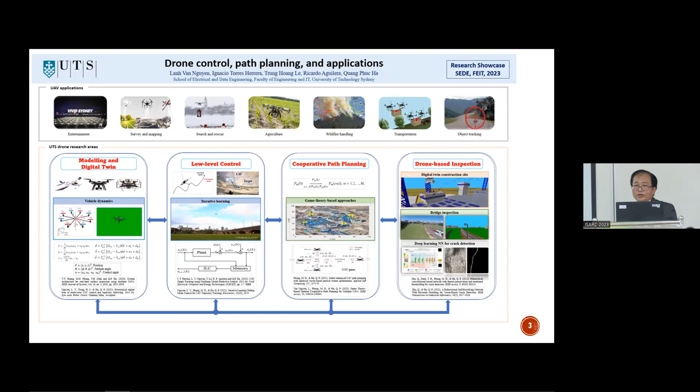Duplicate of this is the digital twin of a monorail bridge, and the computer program to duplicate it. The imaging can go into the next phase of deep learning in order to process the image captured by the drones. And that is our introduction of the whole project.

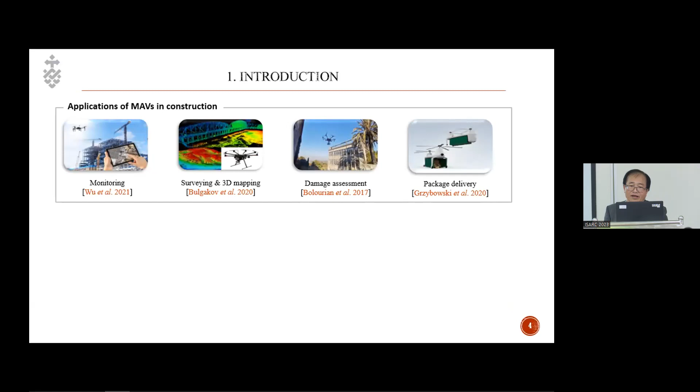It's rather large. We just take a small part in digital twin to present here. You see that a couple of applications are there. The challenge also there, particularly faulty cases or any unexpected scenarios that can happen to the team of UAVs.

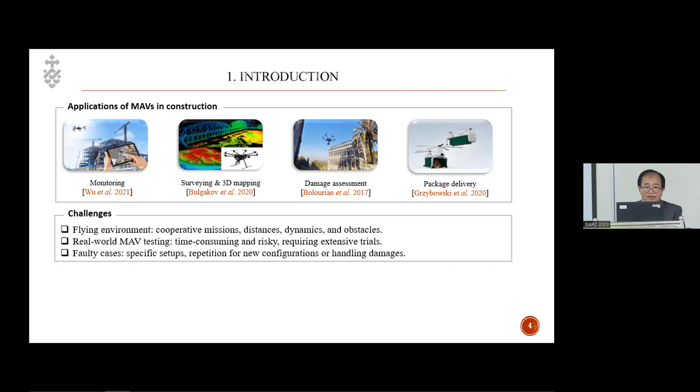So the solution is we have to duplicate that, and the digital twin offers a tool in order to verify for the engineers or the manager to predict the possibility of an incident that can happen, and then we can easily deploy that in practice.

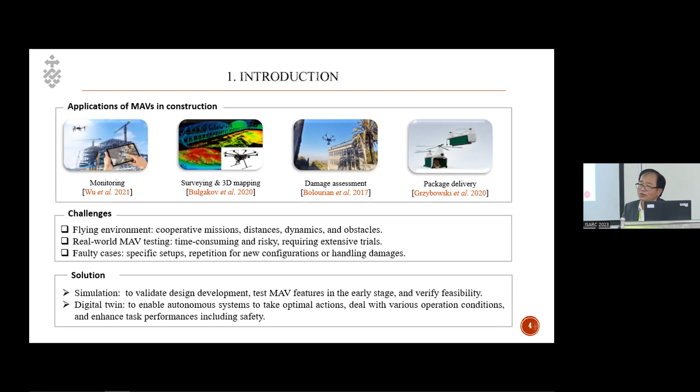Now, this is a multi-rotor aerial vehicle dynamics. If we notice the symmetry between them, then we can understand that everything can be rendered via Lagrangian equations. But finally, it is the thrust that is the summation of the thrust from each rotor to lift up this helicopter.

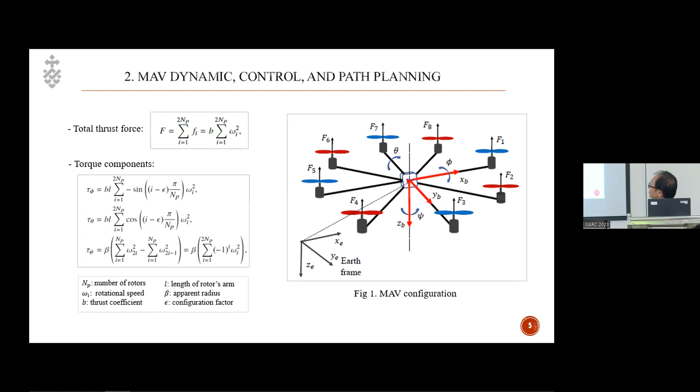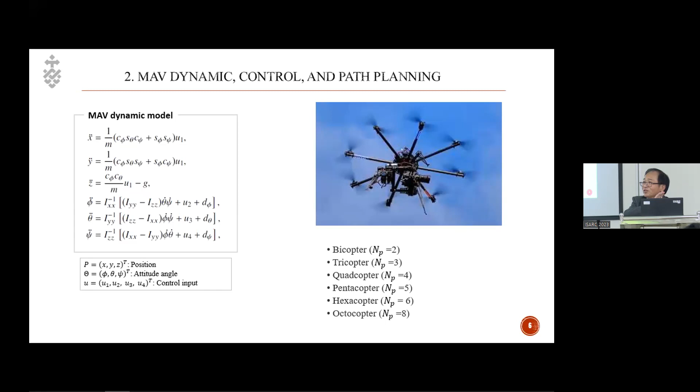So I pose a question from my PhD student as to if there is some fault with one rotor, then maybe you can survive that, because if you use a multi-rotor, for example 8 rotors, you just drop a symmetric pair of those motors and make it survive to at least get back to the headquarters or safely protect it. That is one of the motivations that we use the digital twin, because you cannot just switch off one motor to test that.

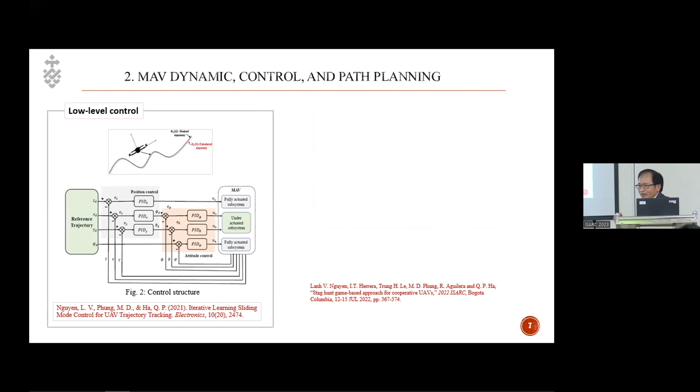So basically for low-level control, our previous work was on how to gain the robustness of the control system so that one of the rotors can be controlled properly, and then you can control them as a team. Coming up to cooperative path planning, this is the application of game theory in order to coordinate the team to execute a robotic task.

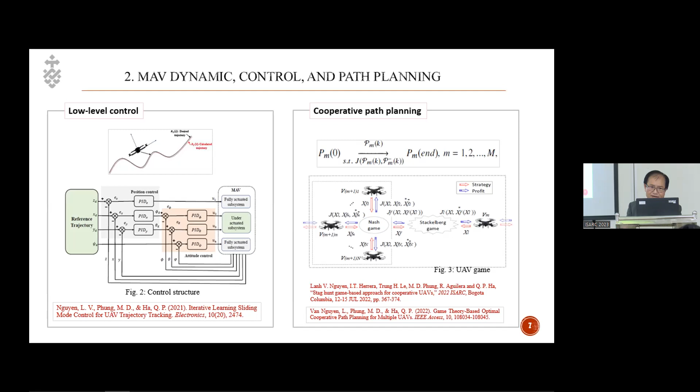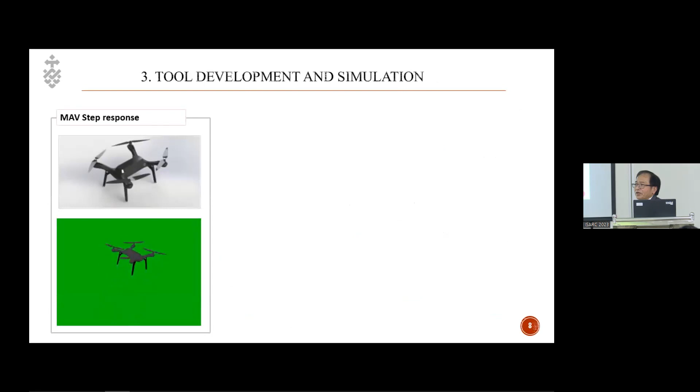We come up with a single task, let's say here is a step response of a dynamic system, if you are familiar with that. From that, you can see the transition of any multi-control mode for this single vehicle. And then we need to capture other equipment.

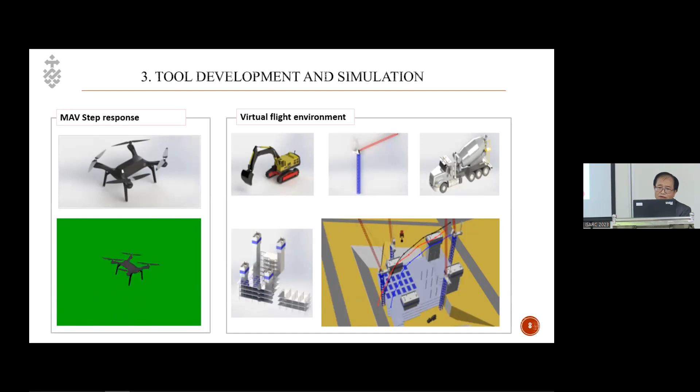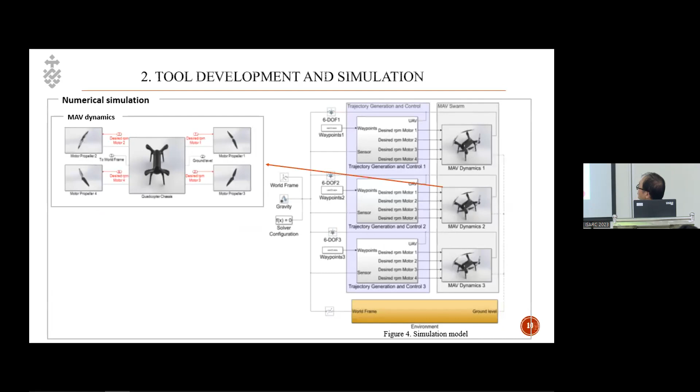For example, excavator, haul truck, tower crane, and the building, etc. And then coming up with how to incorporate this kind of dynamics and interaction into your system. So we have a numerical simulation of that to incorporate in the software, because we develop it from A to Z, so we can manipulate every step of that. I'll just skip some other steps.

If you look at our trend for new direction in development, then the concept of smart city, addressing highly dense population in one mega city, obviously you need to build or predict the infrastructure to address the needs of humans. The government of New South Wales has just approved building a new airport. The construction of a new airport also presents a couple of emissions, a couple of environmental concerns, so the purpose of surveying is rather important.

And we can apply our digital twin in order to do the path planning for our drones to inspect the construction, decades in the making.

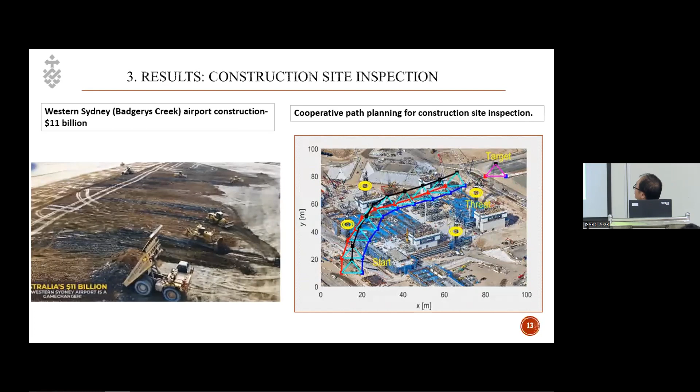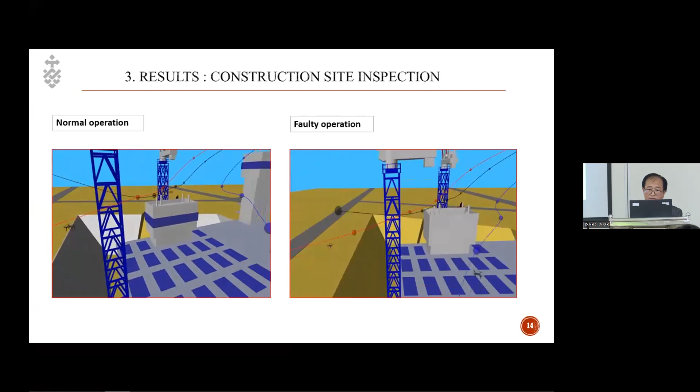So let's say this is a normal operation, and this is a faulty operation to illustrate the concept of how an incident can happen, and the drone can handle the case. So 4 motors would not be successful for the survival. That's think of other things.

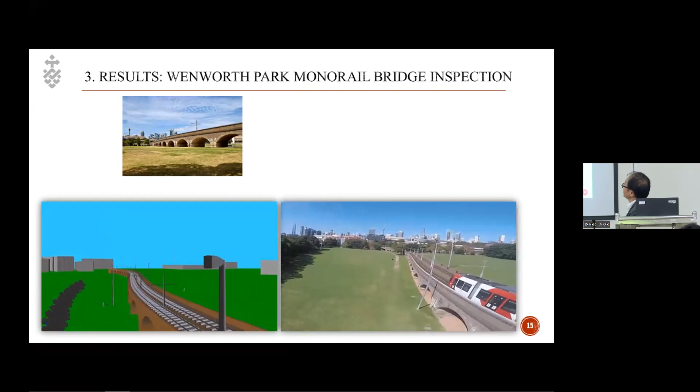Here is the digital twin for the inspection of that monorail bridge. I come to the conclusion that we have a prototype, a digital twin platform for multi-rotor aerial vehicle in terms of path planning and trajectory following.

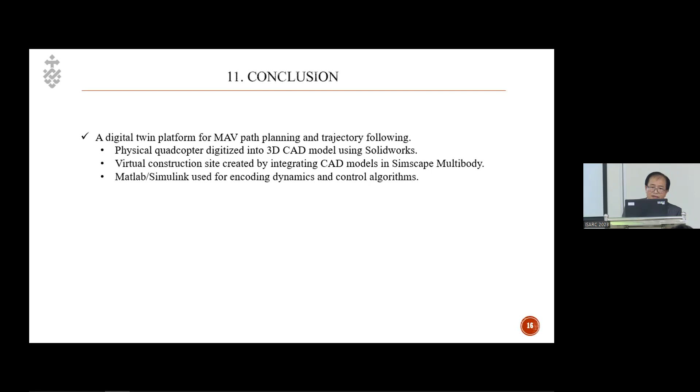Physical quadcopter digitized into a 3D CAD model using SolidWorks and a number of software tools. Virtual construction sites created by CAD integrated into Simscape Multibody platform, and MATLAB Simulink to incorporate the dynamics and control. You do it in simulation, and we use it for path planning.

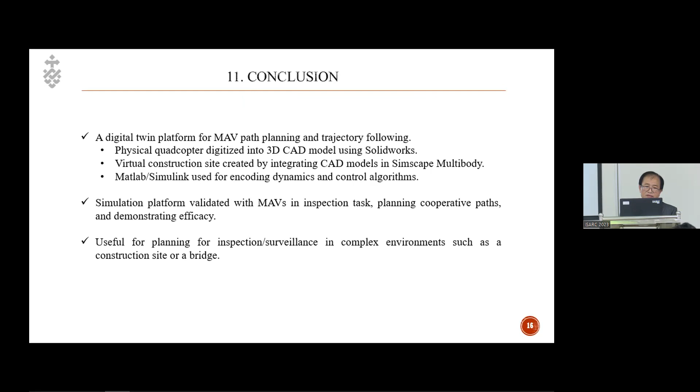To duplicate a complex environment such as the site of an airport construction site or a monorail bridge. And future work would extend the framework to dynamic environments, and we hope that we can incorporate our piece of software developed into other commercial ones. That is the next step of the project.